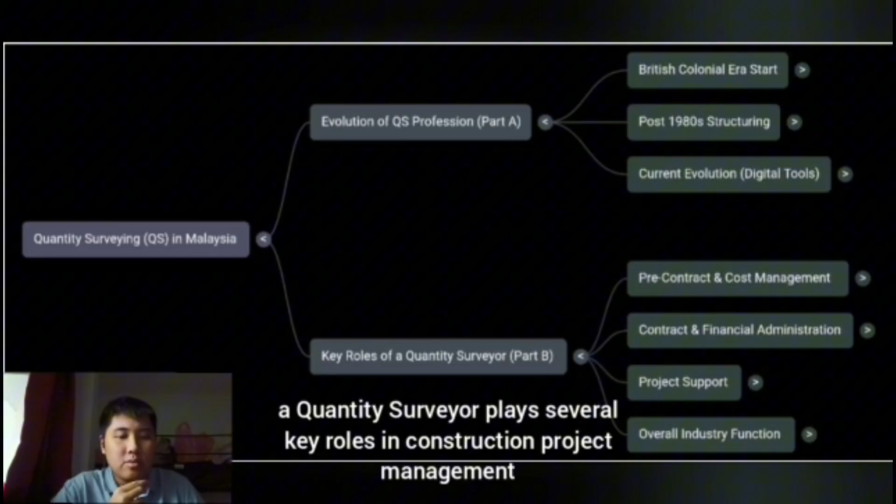QS is responsible for cost planning, preparing the bills of quantities (BOQ), and managing the tender process. They also handle contract administration, progress payments, and valuation to ensure the project stays within budget. QS also supports risk management and communication within the project team to prevent disputes and delays. Overall, based on industry standards, the QS is essential in keeping the project organized, cost-efficient, and professionally managed.

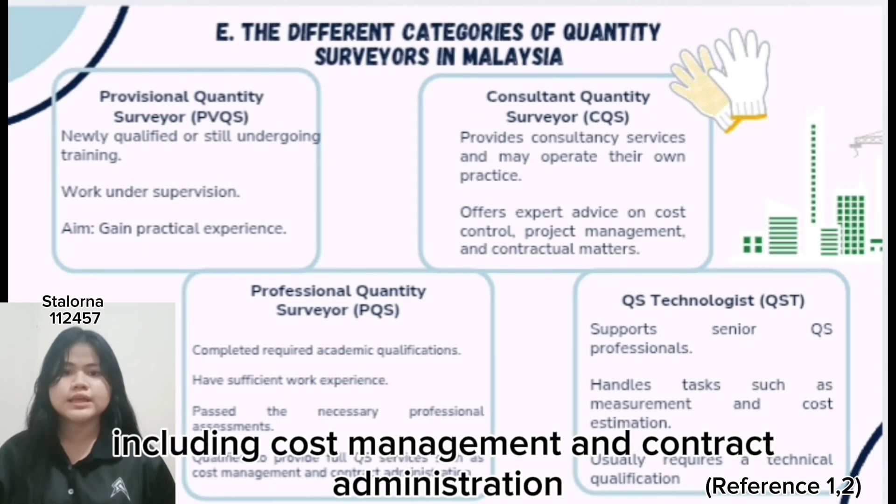The consultant quantity surveyor (CQS) is a senior professional who provides consultancy services and may run their own practice. They offer advice on cost control, project management, and contractual matters.

Finally, quantity surveying technologists support senior professionals with tasks like measurement and cost estimation. This category typically requires a technical qualification.

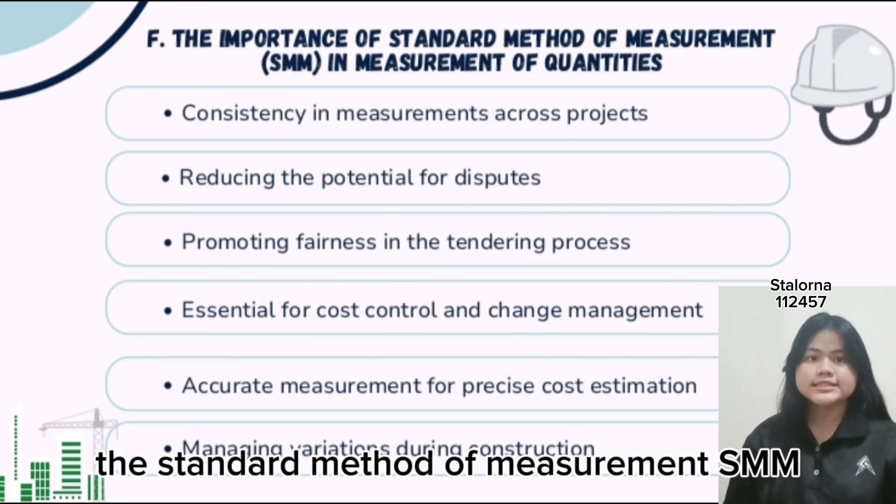The standard method of measurement (SMM) is crucial in quantity surveying. The Malaysian SMM2 provides standard rules for measuring construction work. It ensures consistency in measurement across projects, reducing the potential for dispute.

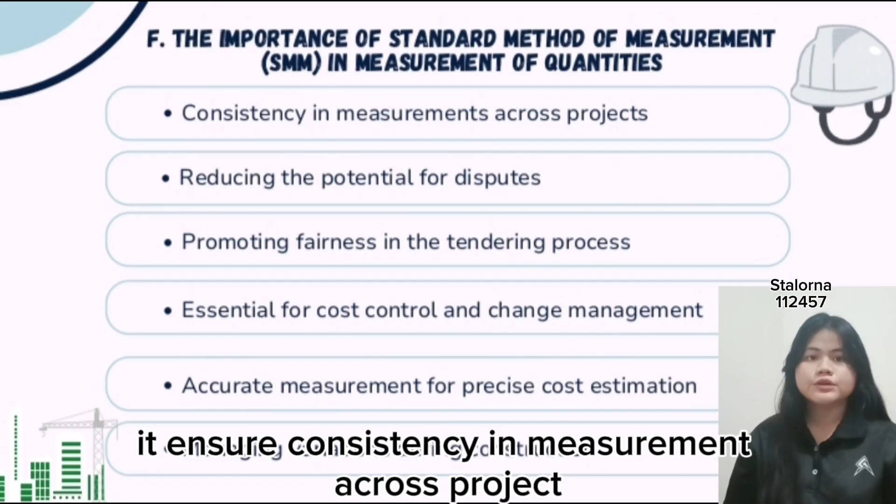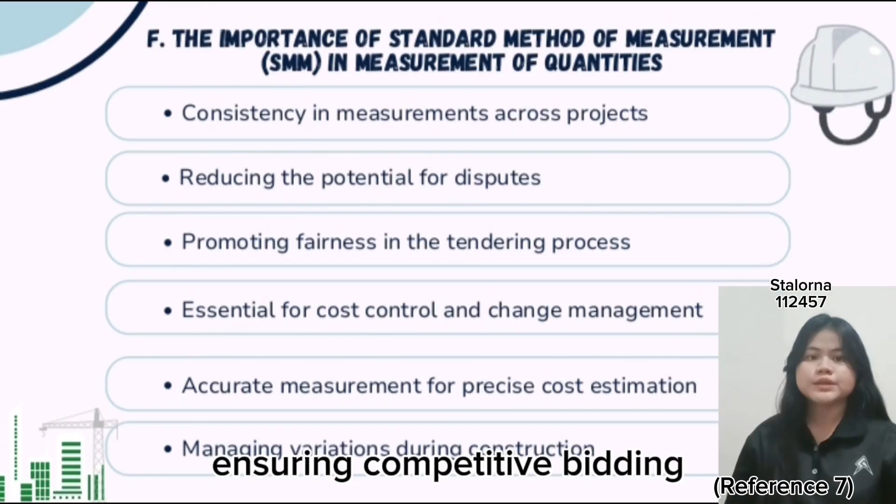The SMM also promotes fairness during the tendering process by allowing all contractors to measure and price work on the same basis, ensuring competitive bidding. Furthermore, it is essential for cost control and change management. Accurate measurement allows for precise cost estimation and helps manage variations that may arise during construction.

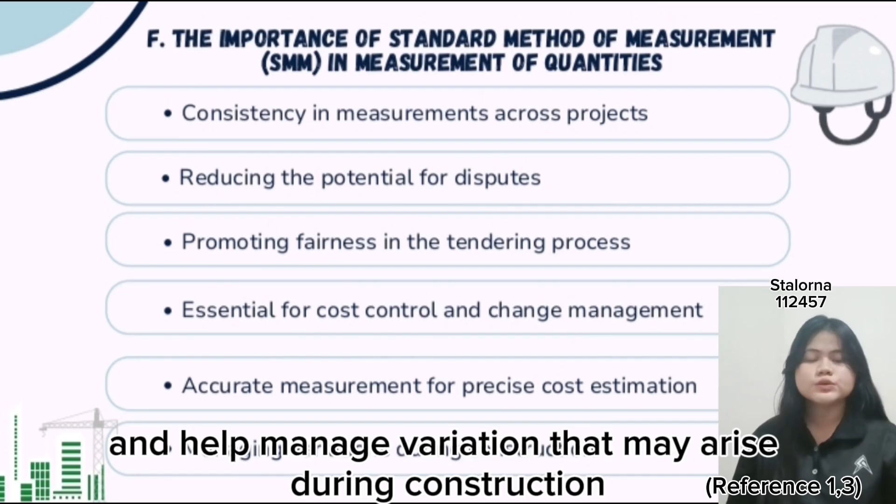Problems arise when a quantity surveyor is not in the team. When a QS is not involved, the project faces many difficulties. First, there will be poor cost control. Without a QS to estimate and monitor the budget, the project can easily overspend and face inaccurate cost planning.

Overall, without a QS, the project loses transparency and faces higher financial risk. According to CIDB and BQSM guidelines, having a QS is essential to keep the project on time, within budget, and well managed. Next is construction and demolition waste management.

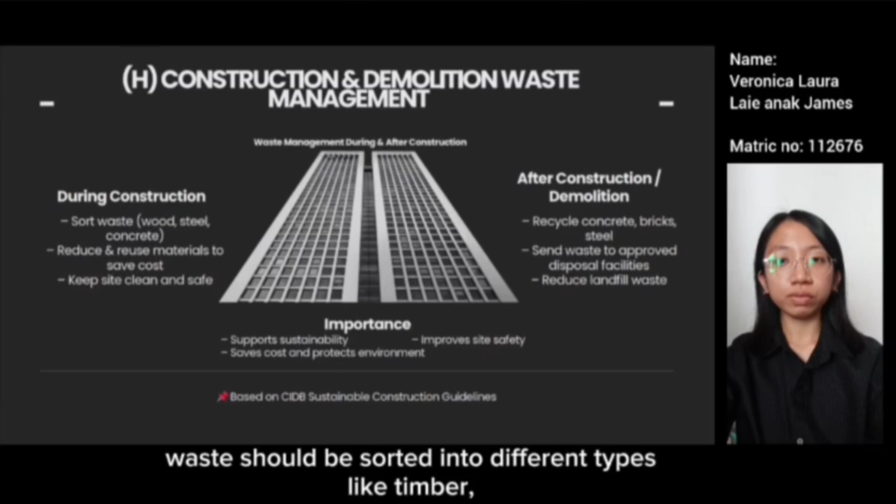During construction, waste should be sorted into different types like timber, steel, and concrete. Materials should be reduced, reused, and recycled whenever possible. This helps to keep the site clean, safe, and cost-effective.

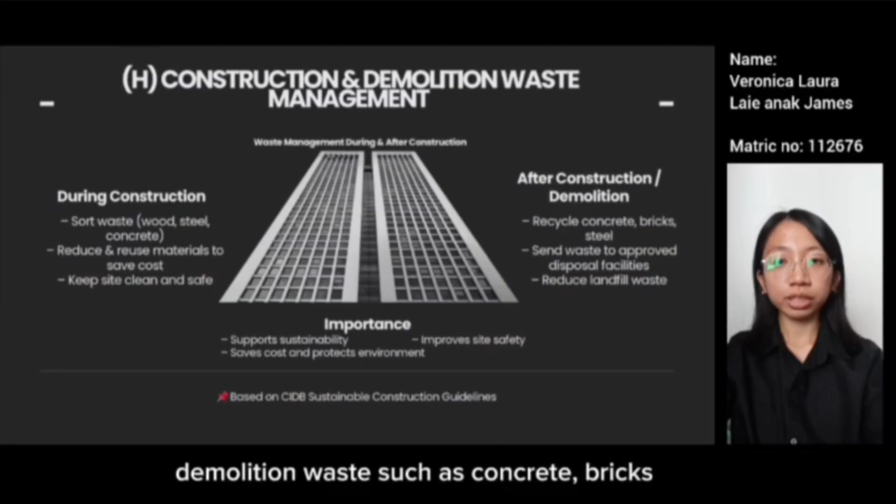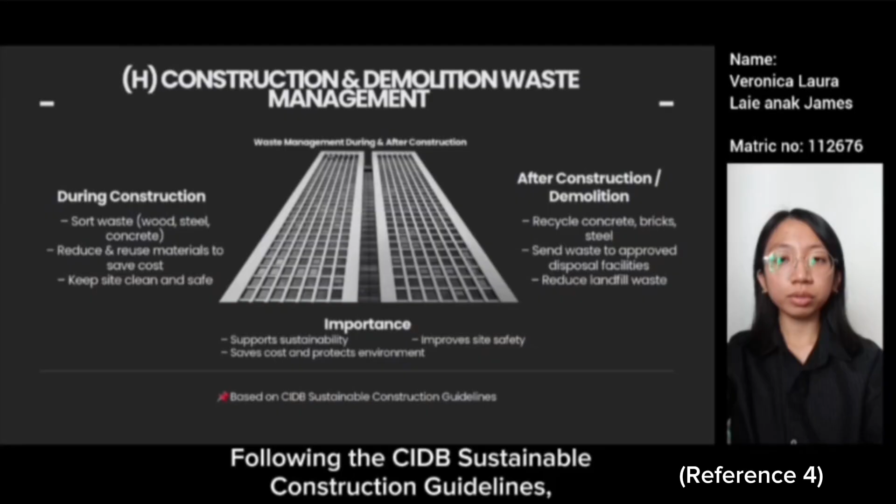After construction, demolition waste such as concrete, bricks, and steel should be recycled or sent to approved disposal facilities. This reduces landfill waste and protects the environment. Following the CIDB Sustainable Construction Guidelines, proper waste management is important for sustainability, safety, and cost savings.

In conclusion, having a QS helps prevent major project problems, while good waste management supports a cleaner and greener construction industry. The quantity surveying profession is very important in the Malaysian construction industry.

QS help control project costs, prepare accurate measurements, and manage contracts to avoid problems during construction. BQSM and RISM guide the profession by setting standards and ensuring QS are qualified and ethical. Tools like SMM make measurement clearer and more consistent, while good waste management supports a cleaner and safer site.

In short, quantity surveyors help make every project more organized, more effective, and more successful from start to finish.